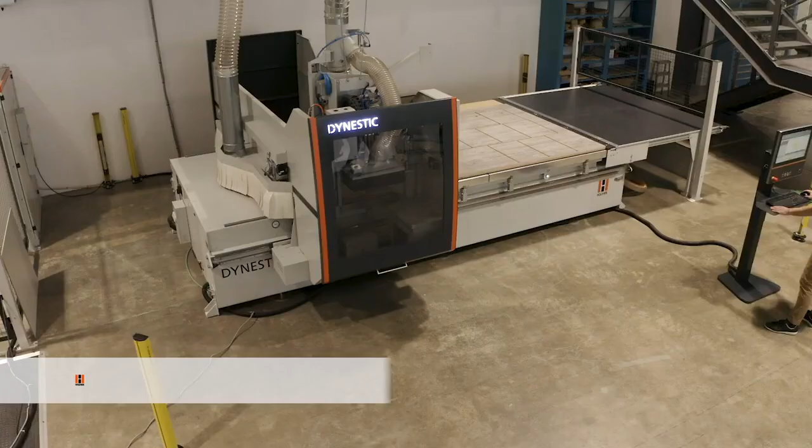Dynamic, flexible, and of the highest quality in every respect. The Dynestic series from Holzher is the machining center for complete panel machining in the nesting process. Thanks to the enormous versatility in its different equipment variants, the CNC series can be adapted to any desired operating mode and the most varied degrees of automation.

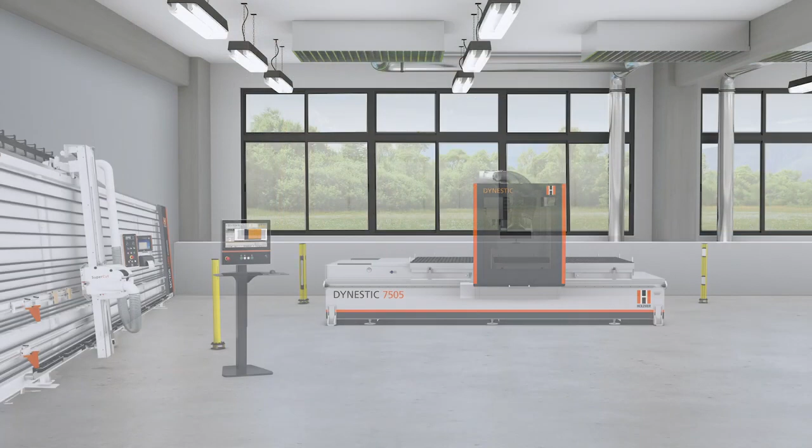The classic versions of the Dynestic 7505 and Dynestic 7507 offer the space-saving and versatile standalone solution for the entire spectrum of CNC machining.

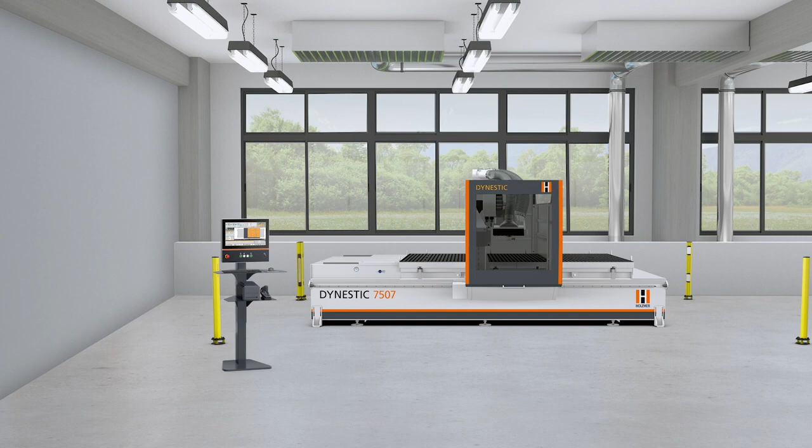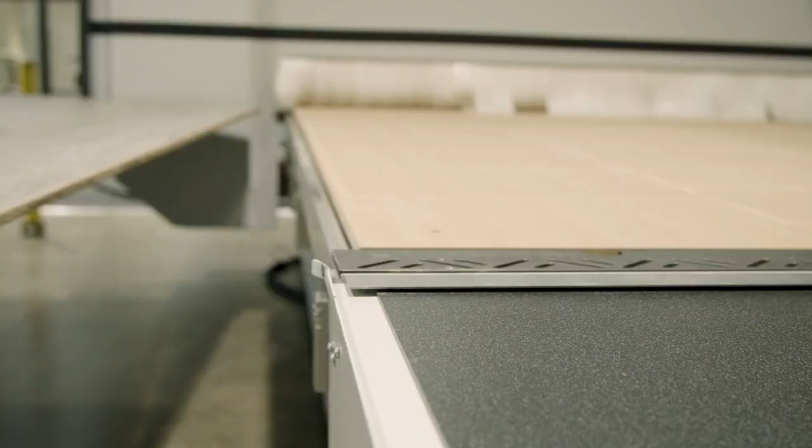Thanks to its modern safety concept, the machining center can be placed anywhere in the room or in a corner to save space. This makes it just as easy to load the machine table using a sheet transport trolley or vacuum lifter as it is to remove the finished nest from all sides in the classic variant.

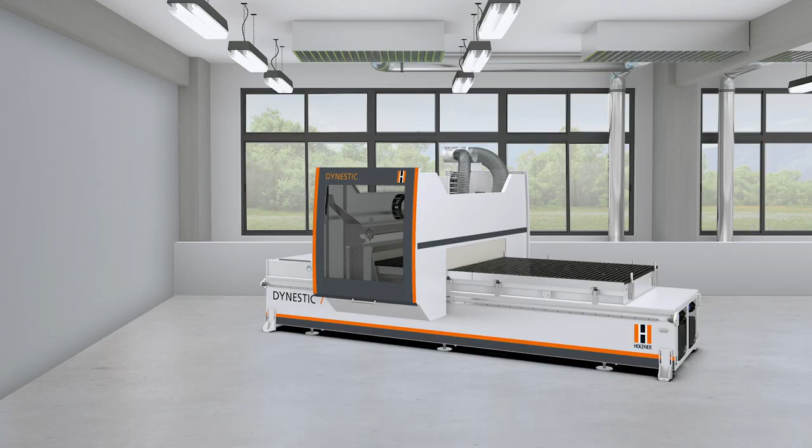The Dynestic series offers the right equipment and machine size for every panel format and the most diverse materials. The machine table of the Dynestic 7505 can process panels up to 1600 mm in depth and is available for panel lengths of 3100 mm, 3700 mm, as well as 6250 mm.

For European panel sizes and special formats, the Dynestic 7507, with a machining depth of 2200 mm and machining lengths of 3100 mm, 3700 mm, as well as 4600 mm, is exactly the right choice.

In the push variant, a height-controlled pusher simultaneously serves to clean the nested workpieces and automatically transport them to the fixed pusher table.

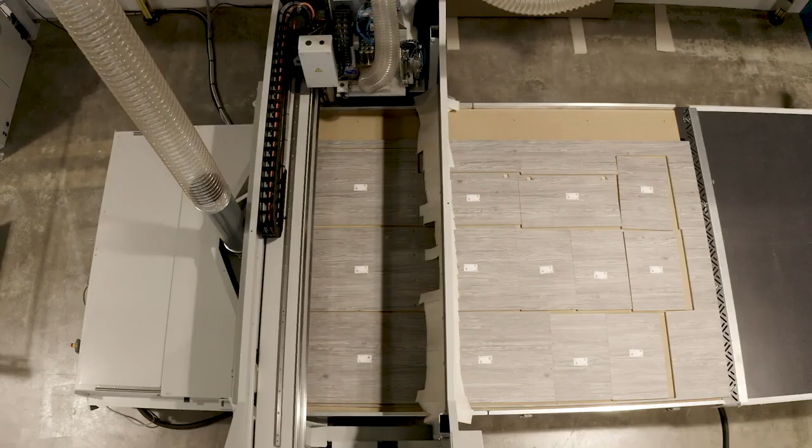With the upgrade to the motorized conveyor belt, you can achieve even higher productivity. The machining table is thus immediately available again for the next plate, and the operator can remove the finished workpieces easily and quickly.

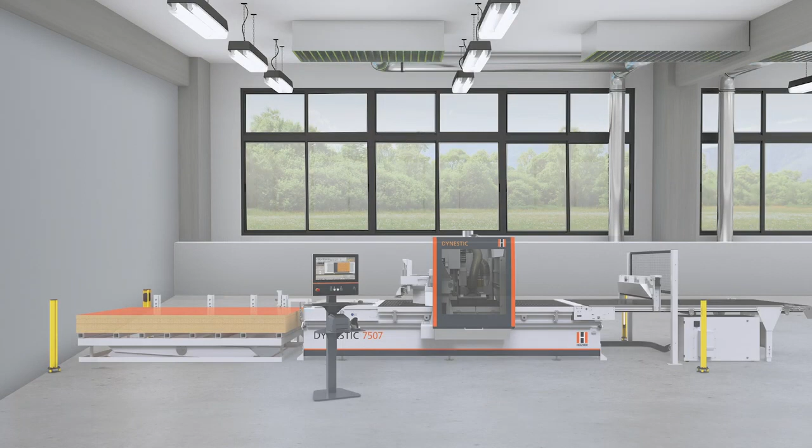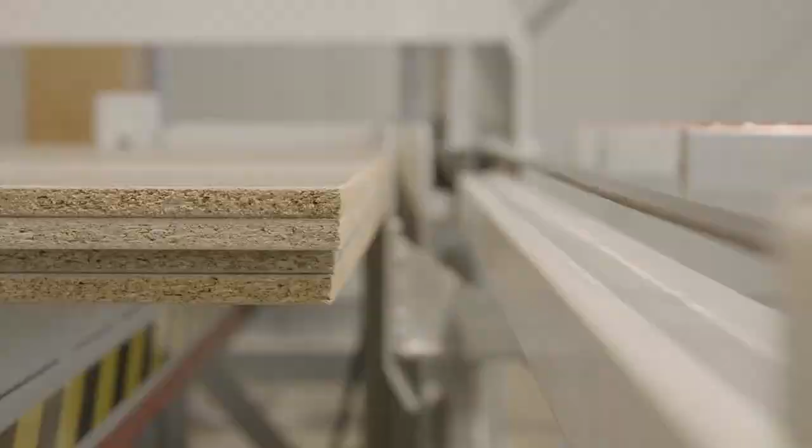The lift variants of the Dynestic are perfectly equipped for processing complete plate stacks with very high plate throughput. The lifting table positions itself hydraulically, and the front edge of the panel is measured for automatic dimensional correction when it is drawn onto the machine table.

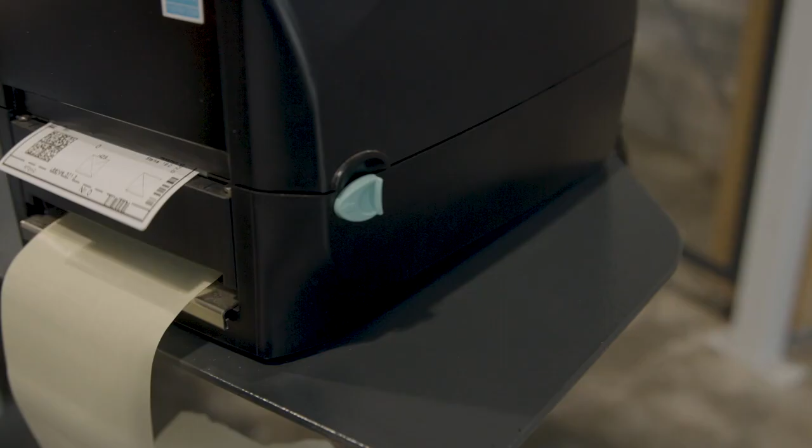At the end of the machining program, the finished nest is pushed onto the conveyor belt and a new plate is picked up from the lifting table at the same time. This creates an efficient workflow with the highest possible productivity.

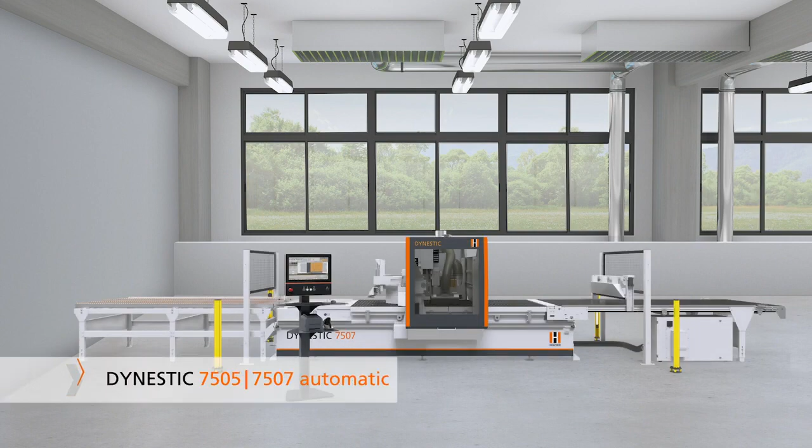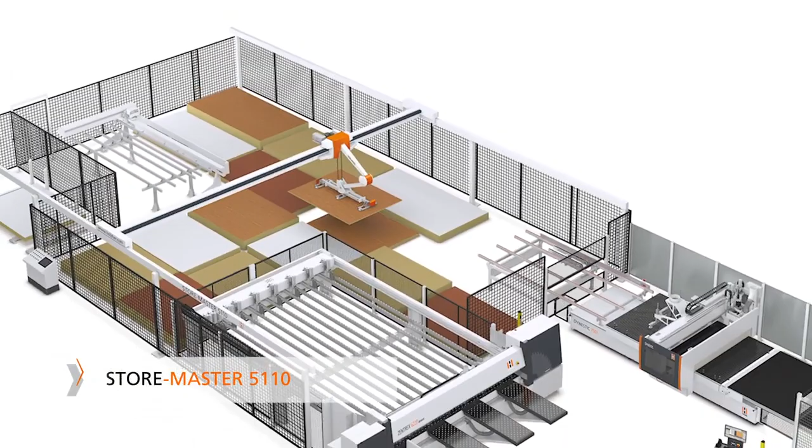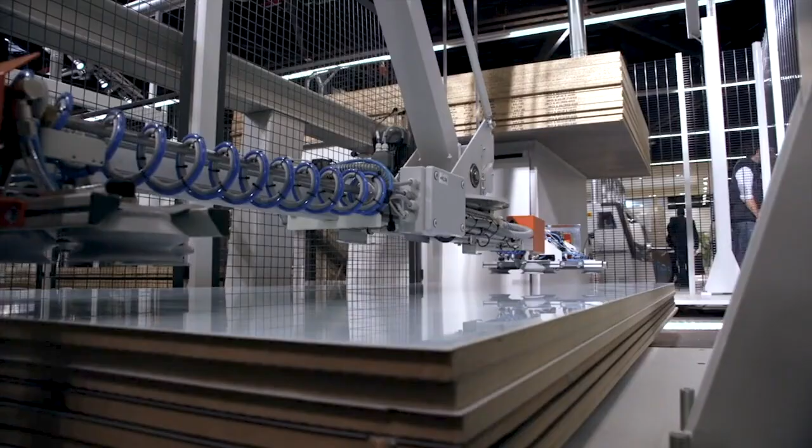In the automatic version, the Dynestic can be seamlessly integrated into an automatic plate storage system. The HOLZ-HER STORE-MASTER system can support series production just as efficiently as the colorful mix of materials for batch size 1. The machining center requests the required plates fully automatically from the plate storage system, which takes over the complete material management and the material and employee-friendly handling.

The extreme dynamics and high pulling power of the powerful 10.3 kilowatt spindle ensure optimum milling results and short machining cycles in carcass furniture construction.

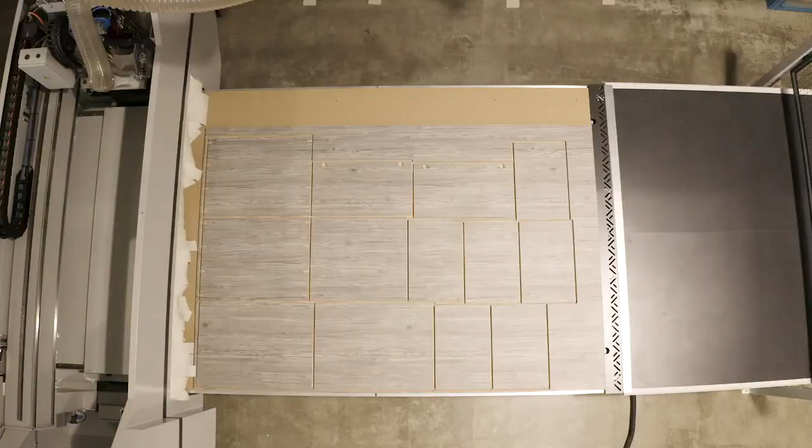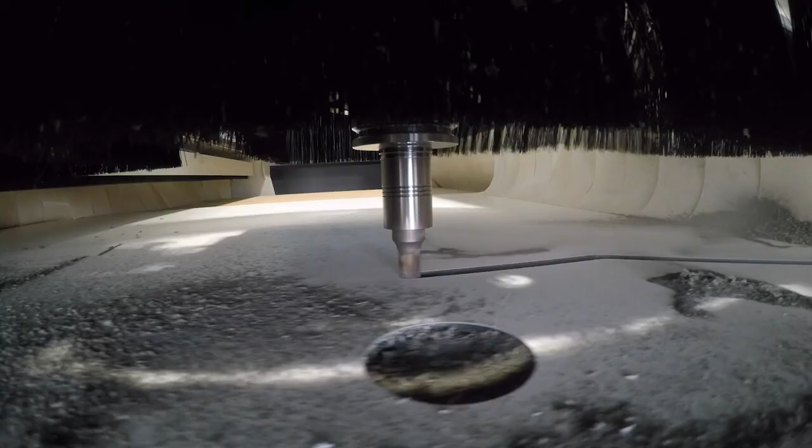For even more performance, the 15 kilowatt power spindle is responsible. With it, you can easily machine solid wood materials as well as composite materials and plastics with the highest quality.

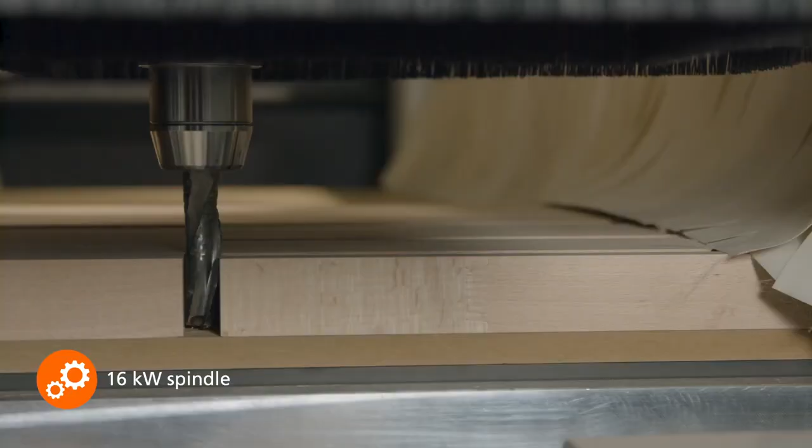Get the ultimate in nesting performance with the liquid-cooled 16 kilowatt spindle that won't back down from any task, including multi-shift operation.

With the optional and fully interpolating C-axis, absolutely flexible results are achieved on the machining center. And these can be seen from any angle.

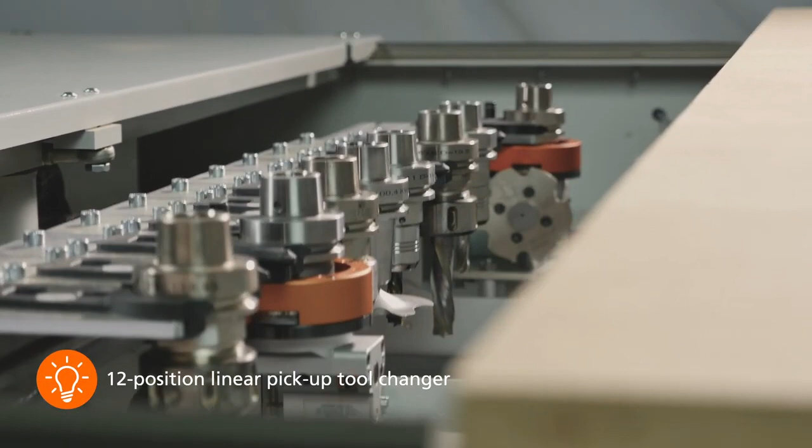Maximum flexibility is offered by the linear tool changer with up to 12 places for tools up to 160 mm diameter.

For the special Clamex unit, the swiveling XY changer can also be ordered. The solution for inserting the Clamex pockets in the panel edges is unique.

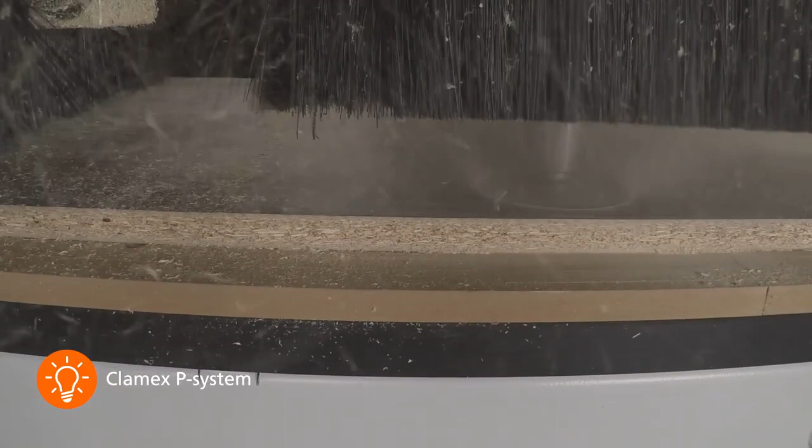A specially designed tool mills a circular pocket and the pockets for the P-system to the left and right of it in a single operation.

The BetterNest freeform software nests the workpieces for optimum material utilization and shortest cycle times.

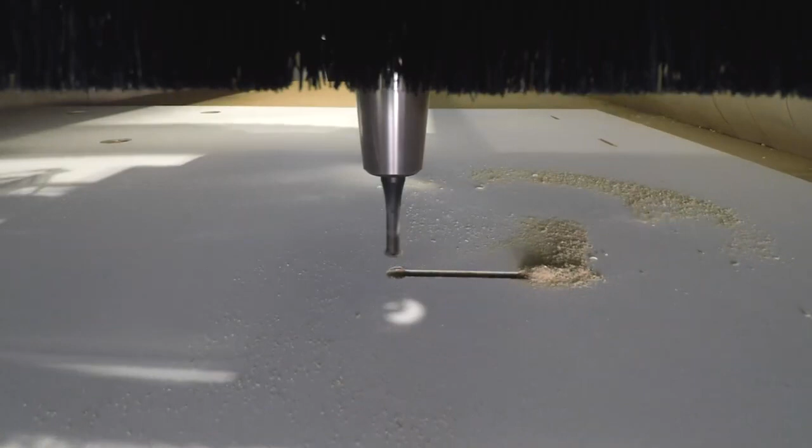The insertion of the Clamex milling cuts in the X and Y directions in the surface can be done either with the pin cutter or, for maximum tool life and optimum machining quality, milled with the side milling cutter.

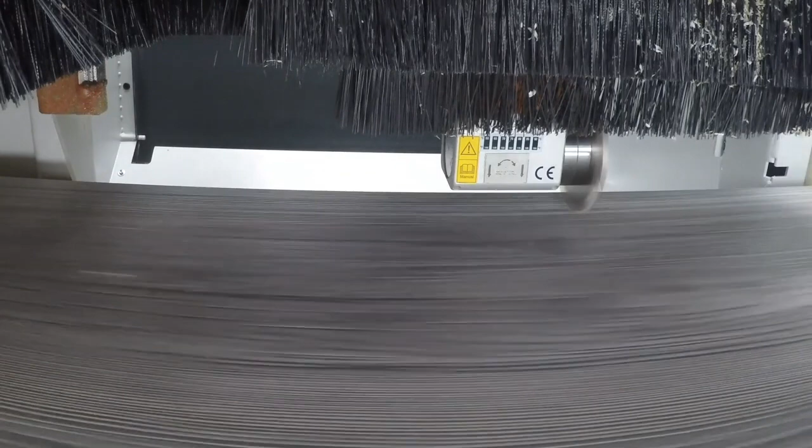With the versatile Cabineo furniture connector too, you have various options for inserting the cloud-shaped recess. Whether drilling or milling, the choice is yours.

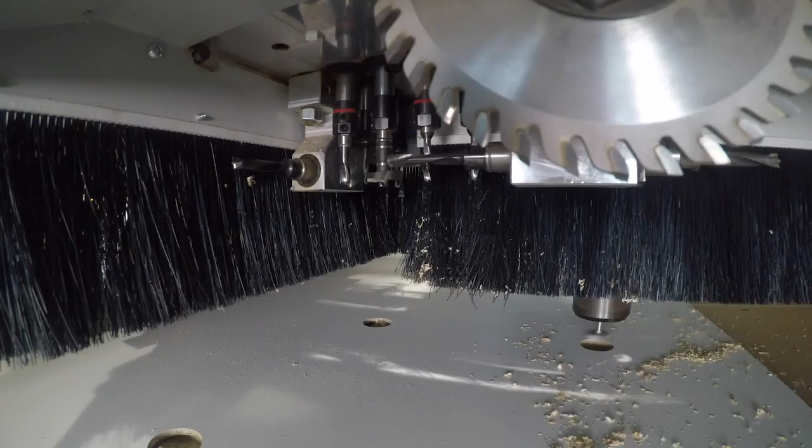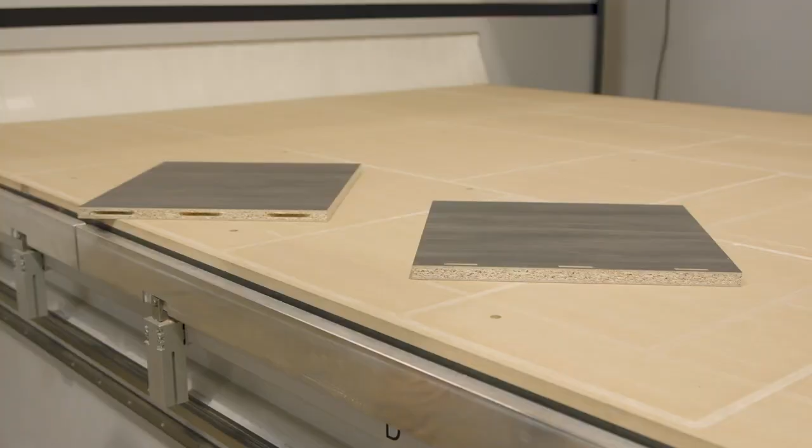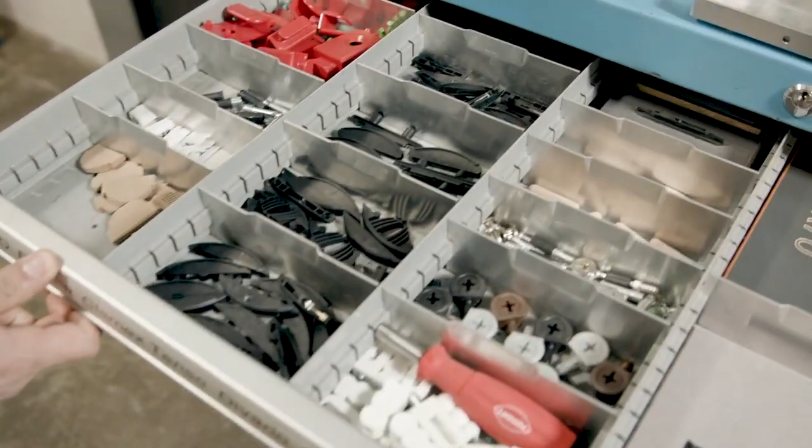No matter which nesting fitting you use, everything is possible on the Dynestic. The Dynestic is the all-rounder among CNC machining centers and thus perfectly suited for a colorful mix of materials and a wide variety of connector technology.

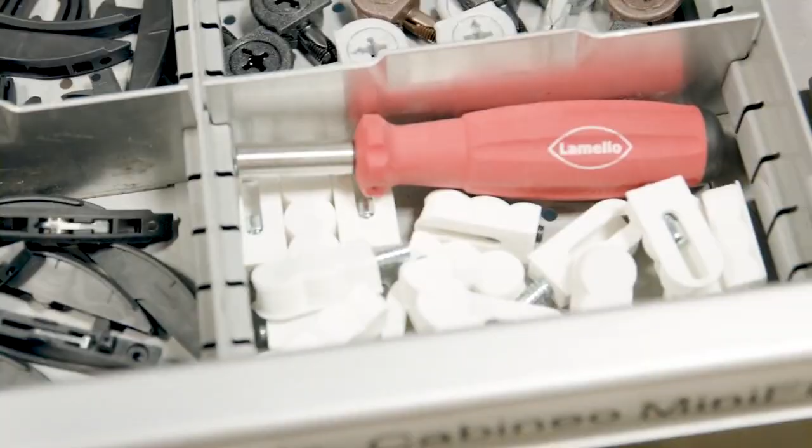The intelligent vacuum field control of the Dynestic independently switches the vacuum area required for the respective plate size to active and thus optimizes the applied vacuum power.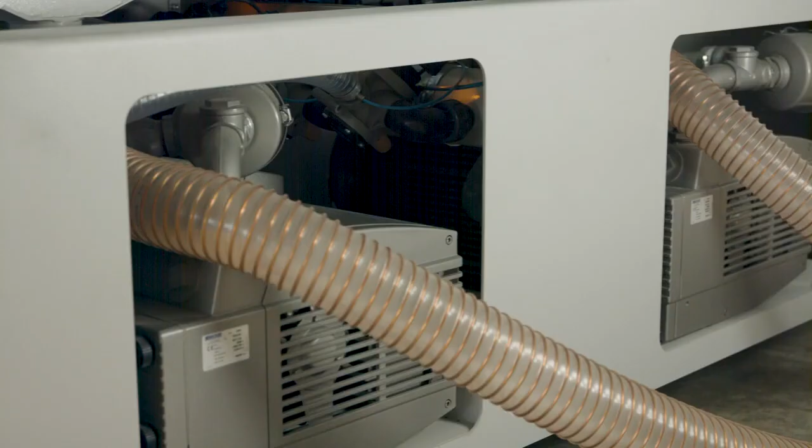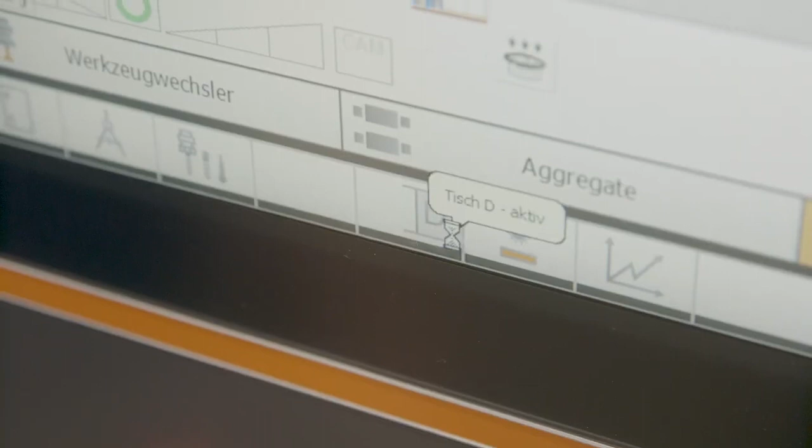About the software-controlled EcoVac system, the vacuum pumps switch on in sequence and only when required, thus saving valuable energy. The vacuum required for the respective processing is monitored and sufficient power is provided for this purpose.

Valuable information for further processing and assembly of the workpieces is provided by the print module for labels. The labels can contain the commission, the part designation, the machining programs for the edges, barcodes for identification, and, of course, your company logo.

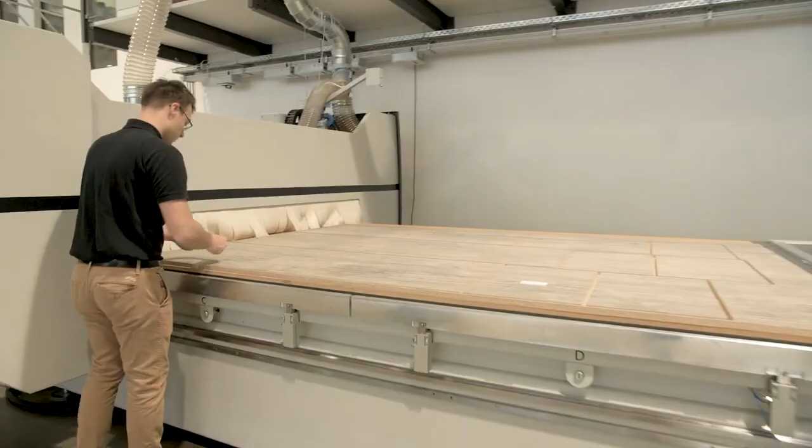HOLZ-HER offers several solutions for generating labels from the BetterNest software. The Touch Label Light system adds the label software and printer to the operating terminal of the Dynestic, allowing labels to be printed by touching the desired workpieces on the nest plan.

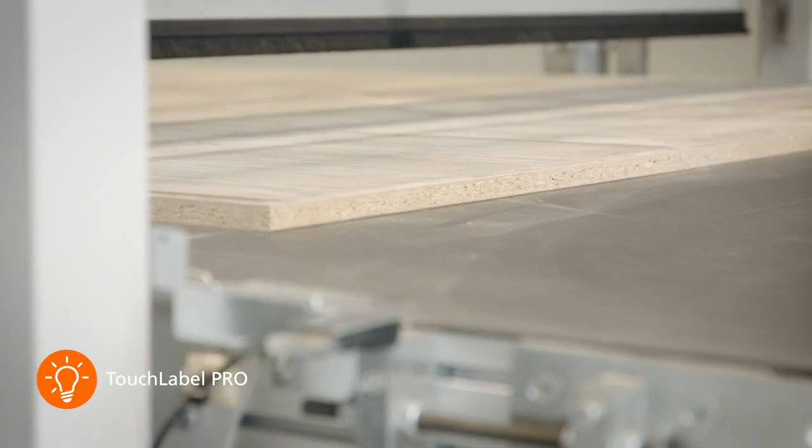For a higher degree of automation, the convenient TouchLabel PRO system is suitable, mounted at the end of the outfeed conveyor belt. Here too, the appropriate label for the respective part is generated and printed when the monitor is touched.

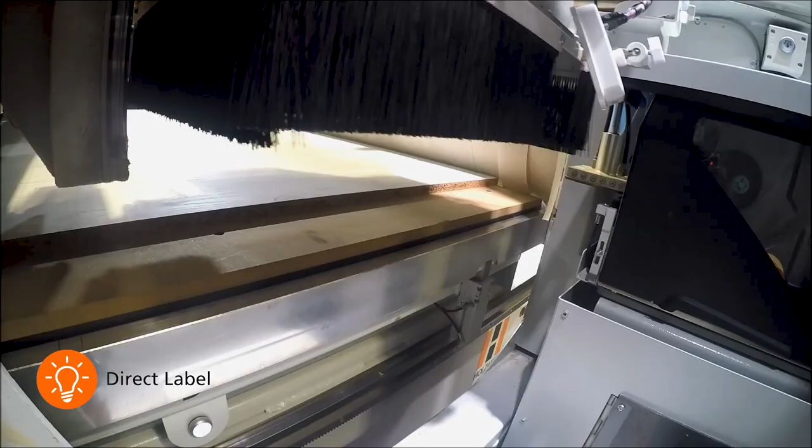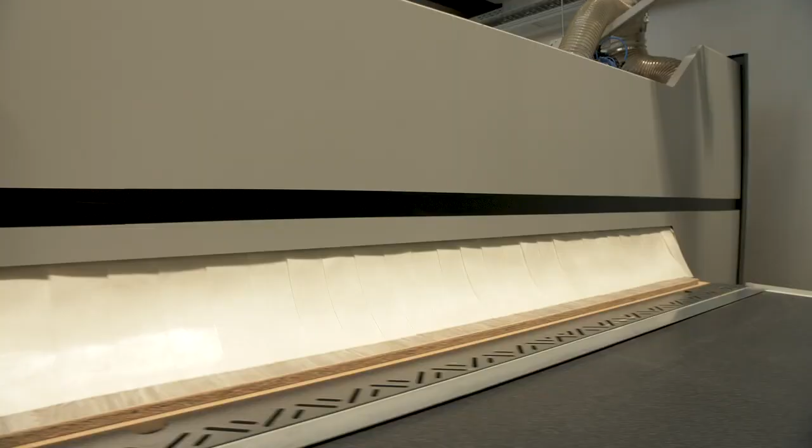The fully automatic direct label system integrated into the machine offers maximum convenience. Here the labels are automatically applied to the correct position on the plate before CNC machining, significantly increasing process reliability.

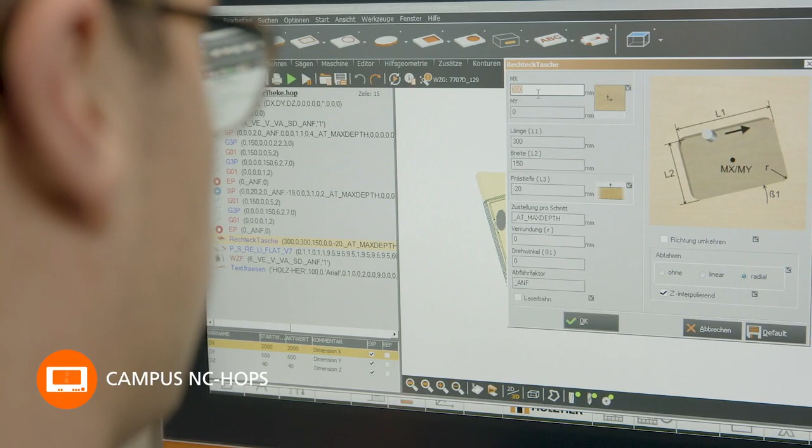With Dynestic, ease of use of the control elements is at the top of the list. The recognized leading and versatile Campus NC-HOPS software package offers simple programming of even complex parts thanks to a wealth of existing macros and auxiliary functions such as easy snaps, free planes, auxiliary geometrics, and much more.

This means that, in addition to furniture parts, complex components can be generated fully parametrically with just a few clicks. All programming levels are arranged in an extremely clear and user-friendly manner.

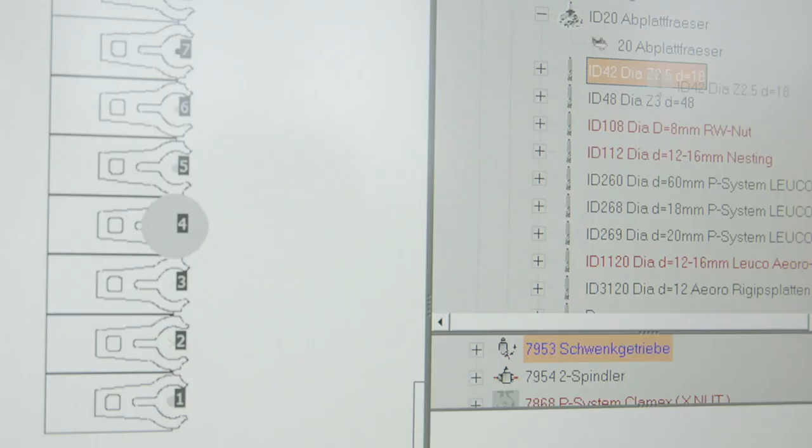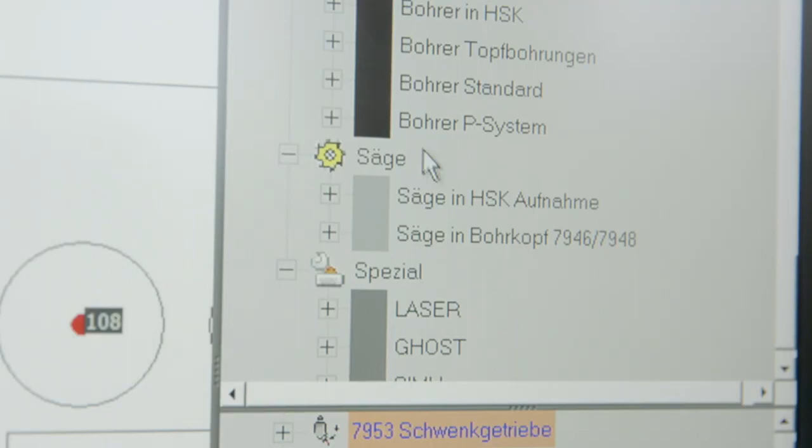In the intuitively operated Tool Management MT Manager, you equip your machine with the necessary tools, while the application area, important tool parameters, and profiles can always be kept in view.

On the 21.5-inch multi-touch screen, you can already work dynamically and with fingertip feeling while programming.

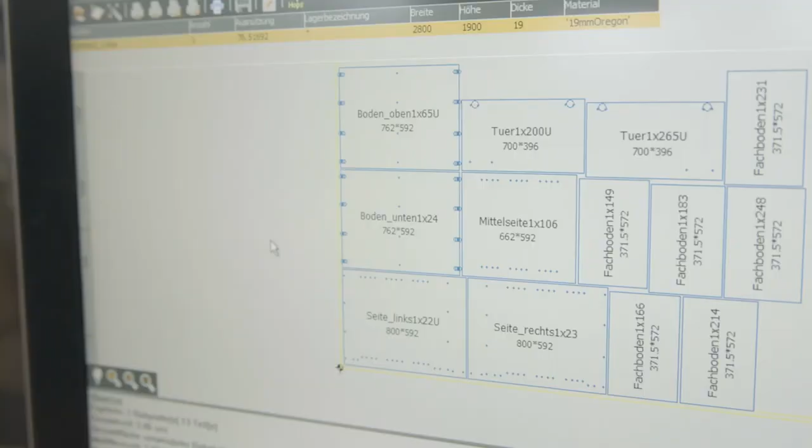The HOLZ-HER BetterNest nesting software is responsible for optimum and waste-optimized results. The rectangular nesting function fits furniture parts and other rectangular components into the selected raw panel with just one mouse click.

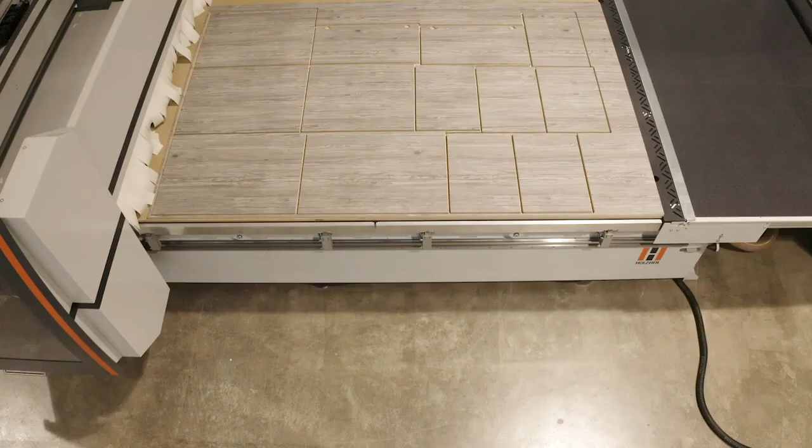If you like it more individual, or molded parts are more frequent, freeform nesting is exactly the right choice. Here, the components are perfectly nested into each other, taking into account the outer contour and the grain pattern.

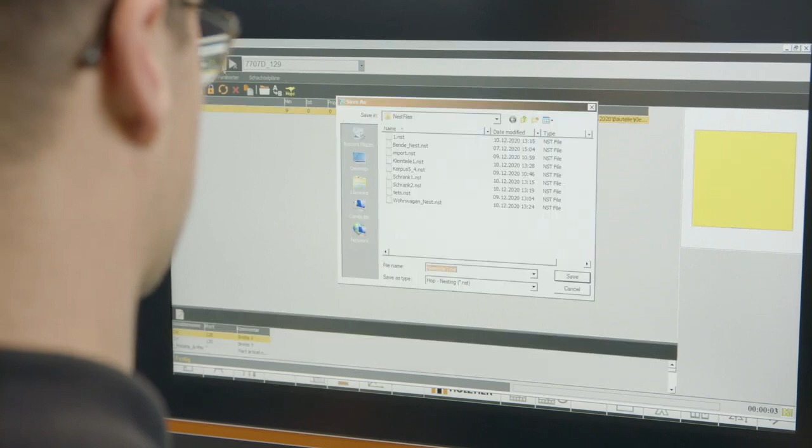To guarantee maximum process reliability, BetterNest has been equipped with additional intelligent features. Small parts can be milled in the nesting plan with the desired machining strategies, onion skinning, where the parts are milled in several steps, or with small bridges, the so-called bridging mode.

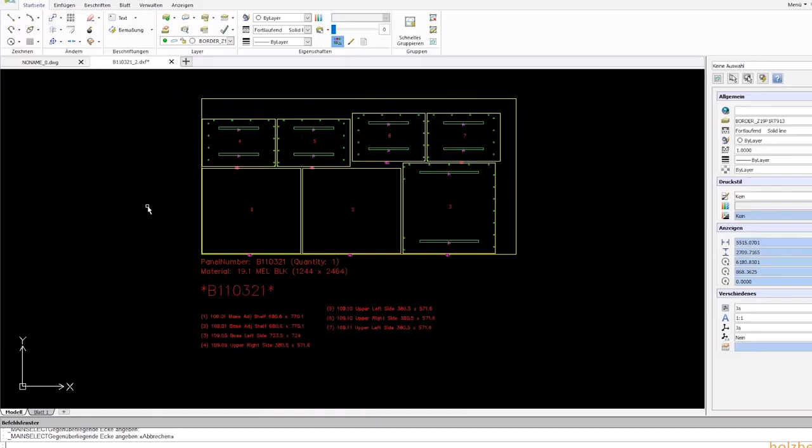Also standard and of growing importance is the professional DXF import of components and nest plans from CAD software. Drawn with suitable layers, the CAD drawing can even be placed directly on the work center and thus virtually on the machine table, then processed without intermediate steps.

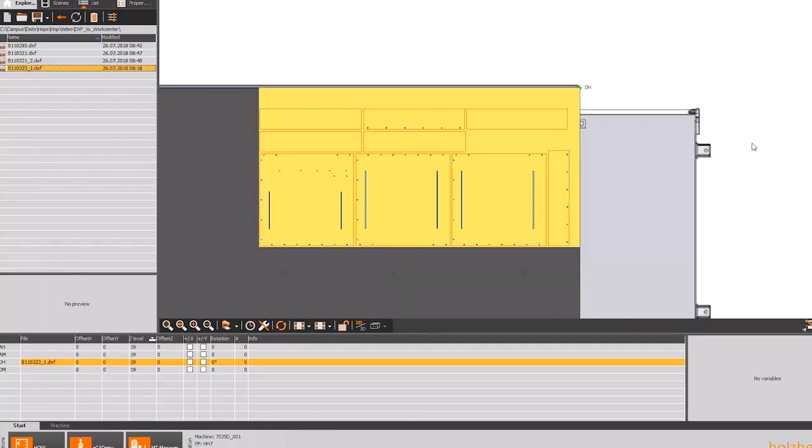Thanks to the open interface to post-processors, HOLZ-HER machining centers also offer enormous flexibility for data transfer from leading CAD/CAM programs.

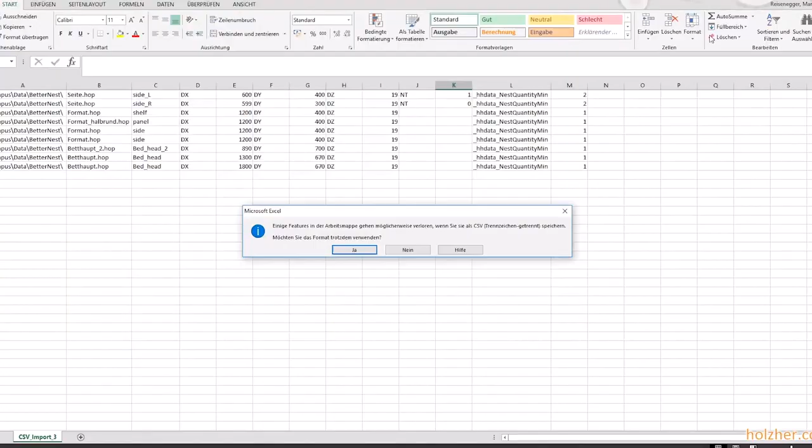Via the BetterNest Plus add-on module, complete data records can also be read in the defined CSV format and automatically nested in the BetterNest Freeform software. This means that even the transfer of large orders with a large number of individual parts is no problem.

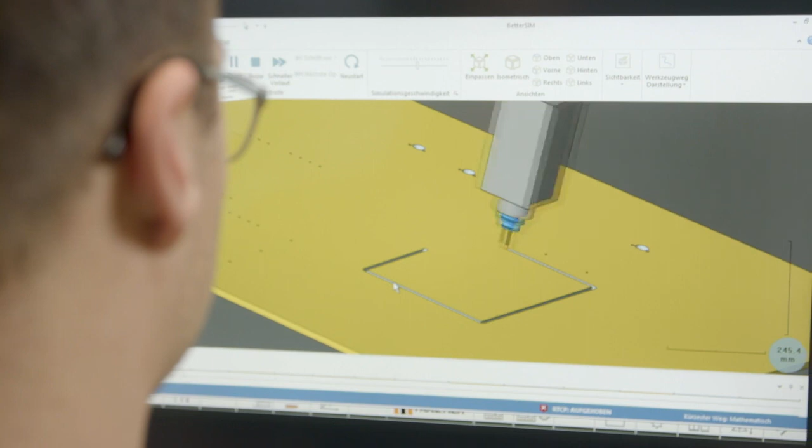The sequence simulation of the CNC program supplied as standard can optionally be extended to the 3D ablation simulation shown here. With the optional touch tool length measurement, precise and fast length measurements of standard tools is fully automatic.

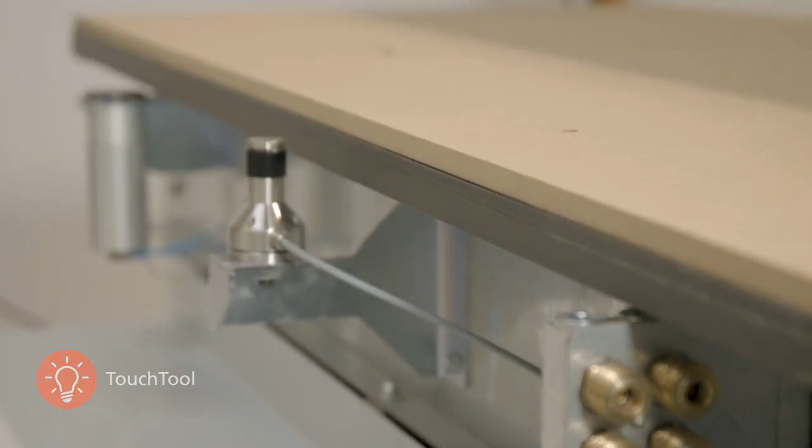With the optional touch tool length measurement, the precise and fast length measurement of standard tools is fully automatic. The measured length is automatically corrected in the tool database.

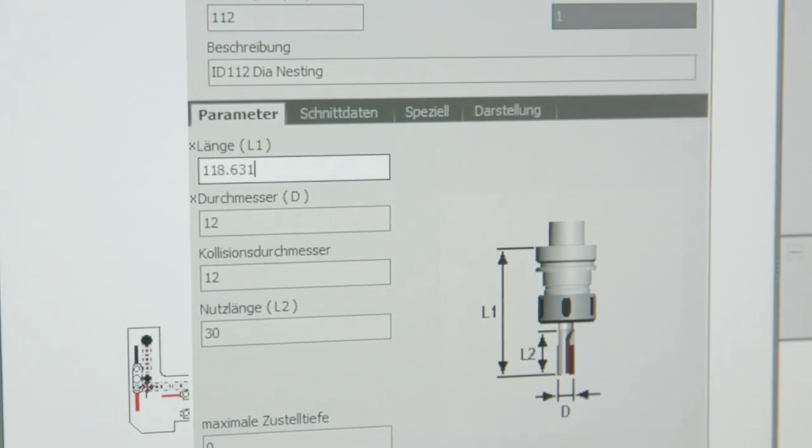Important sensor data such as spindle temperature, tool imbalance and double speed monitoring are provided by the chip control spindle sensor. Helpful hints and warnings are perfect, especially in combination with the VIA Cockpit digitization package.

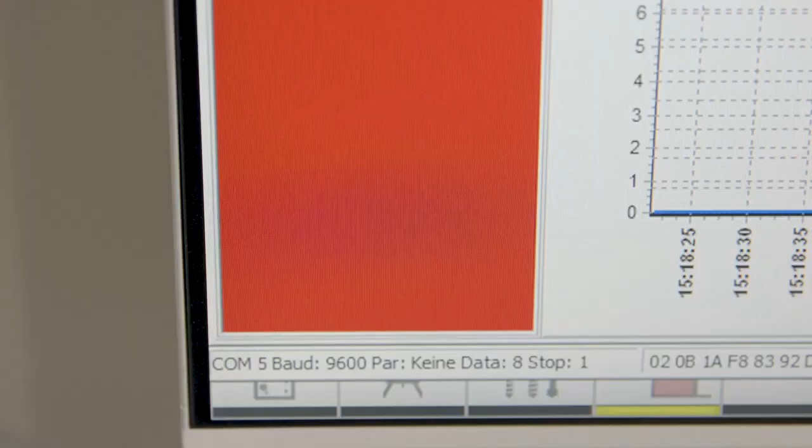Helpful hints and warnings are perfect, especially in combination with the VIA Cockpit digitization package, and the possibility to display these messages for prevention also on the VIA Condition module of mobile devices.

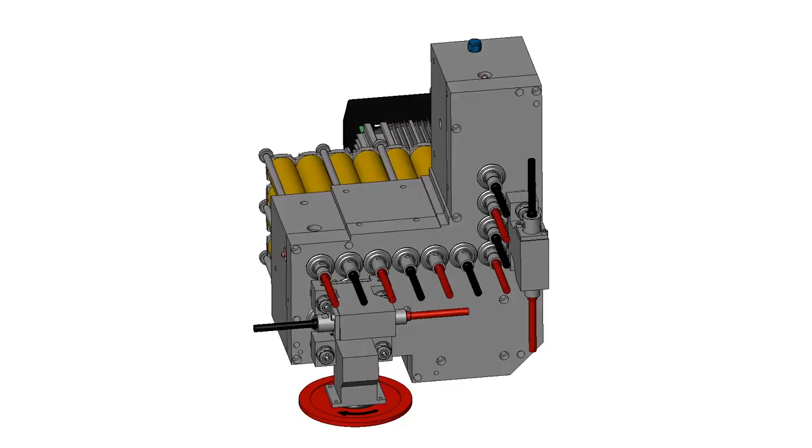The integrated drilling unit is ideally set up for row drilling and back panel grooves in furniture and structural engineering. For even more flexibility, the XL drill head can also be selected.

The machine software automatically optimizes the tool sequence. The speed and feed rate are also trimmed via the control system to achieve long tool life and high performance at the same time.

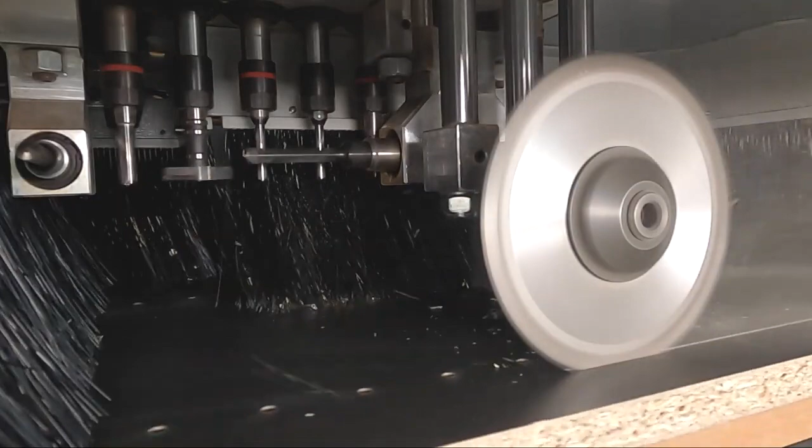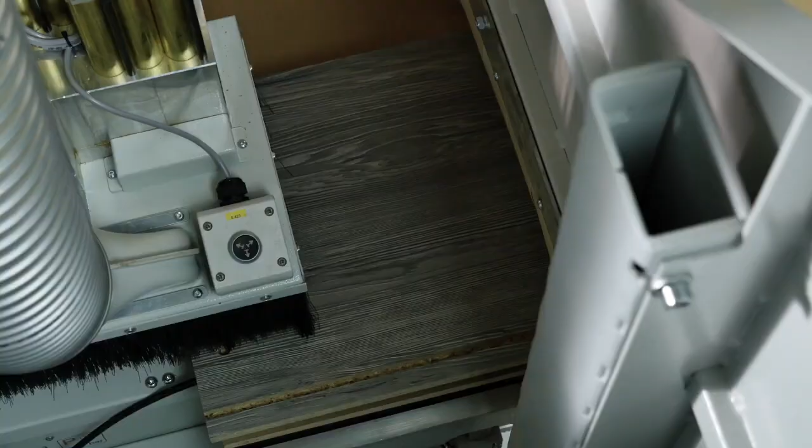Of course, traditional dowel connections are also quickly inserted. Horizontal drilling for dowels and mini-fix can be carried out in a second machining of the workpieces on specifically developed vacuum suction cups.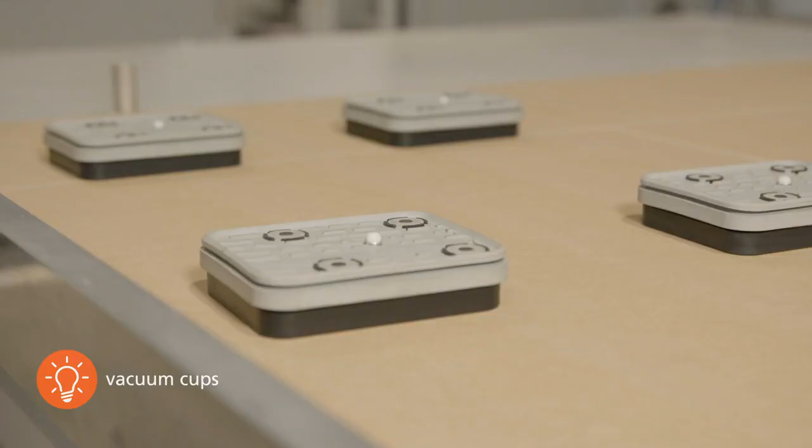The vacuum cups can be operated with or without hoses, depending on the vacuum performance requirements. Profile milling, groove joints and other milling work are thus also no problem, particularly convenient in combination with a front stop row.

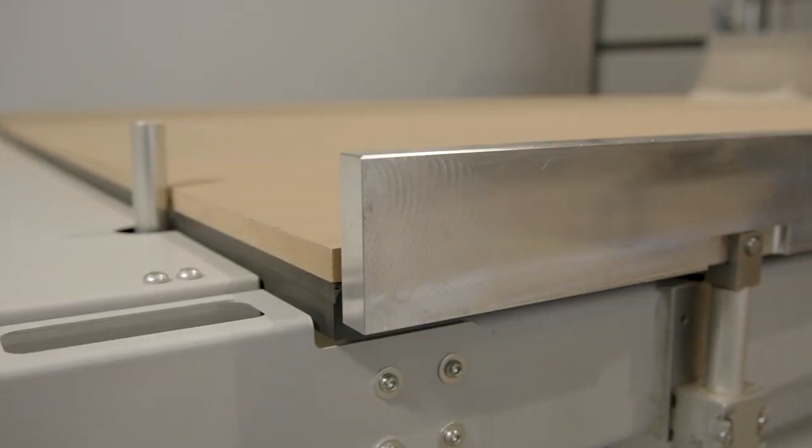You need a quick cut through a workpiece? With the Direct Cut software's single cut function, you save yourself a trip to the sizing saw. The laser shows you the way.

Was a workpiece damaged during assembly? Is a base missing on the construction site? Or do you still need a few additional shelves? With the optional Direct Cut module with line laser display, a few mouse clicks are all it takes to turn your leftover pieces into valuable workpieces.

The line lasers show you the exact course of the cutting lines at the touch of a button, thus also allowing you to avoid wood defects or damage in the finished components.

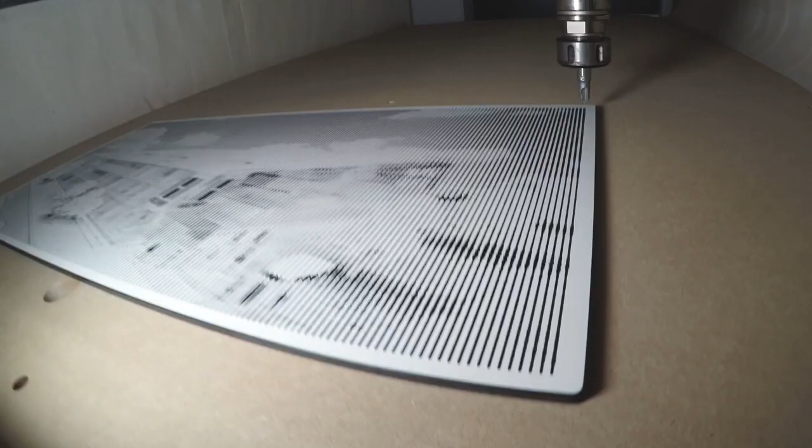Another interesting application is light reflective engraving with the Pic2Plate software, available as an accessory. Digital images are simply read in and the colors are automatically converted into milling depths, creating fascinating images in 3D effect for versatile use from store fitting to private objects.

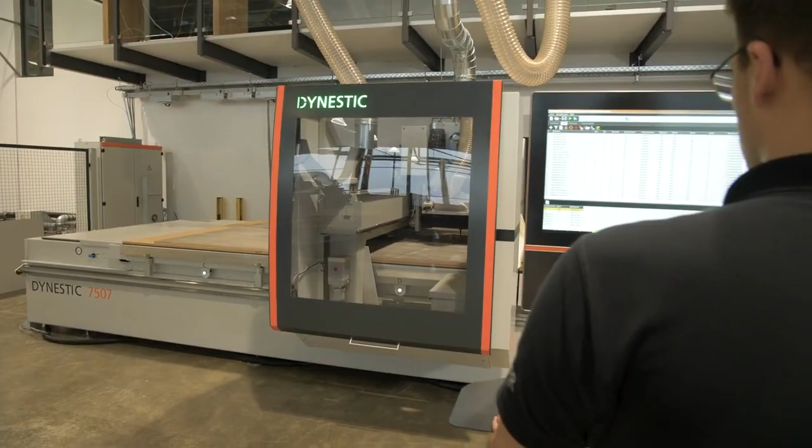The Dynestic series from Holz-Her is the ideal all-rounder for your workshop. The operator is relieved by smart functions and permanently informed about the operating status of the machine via the LED machine logo.

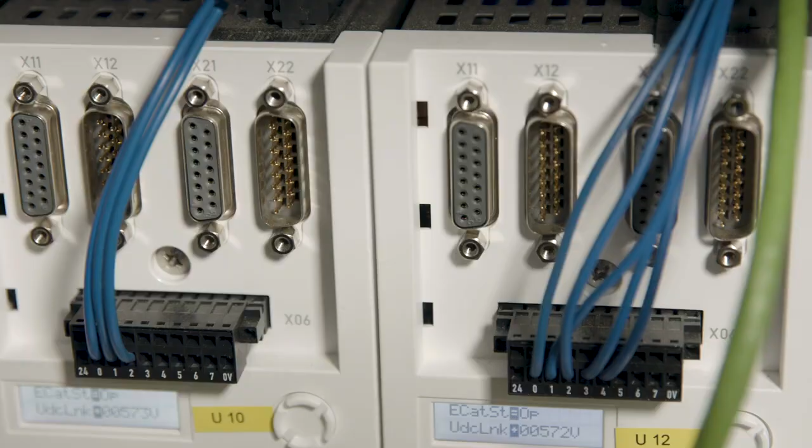A massive gantry design combined with high-quality machine components such as precise synchro drives, hardened linear guides and steel belt deflection, and the Eco air conditioning unit for the control cabinet installed as standard, make the Dynestic a reliable partner for your production.